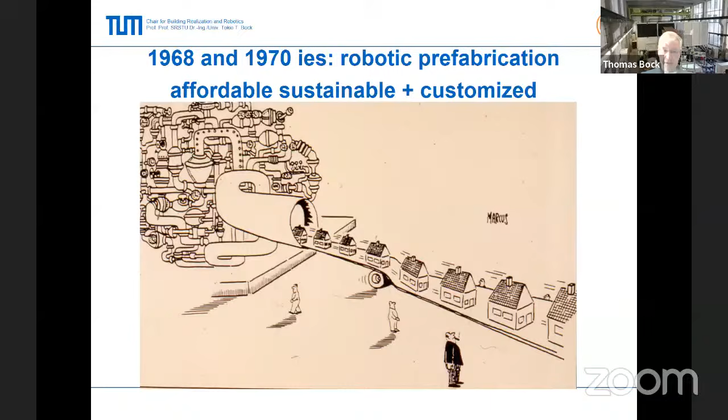And later in the 70s, this industrialization prefabrication became more and more customized. And here, especially robotics played a crucial role in order to produce prefabricated one-of-a-kind buildings. For example, one of the first systems I did myself was a masonry robot, because in Germany, people like to live in brick buildings. But building a brick building by hand takes a long time and has a high labor cost share.

So here we produced a prefabrication robot for masonry walls. And here you see how the robot is placing the brick and spreading the mortar. This was exactly 32 years ago.

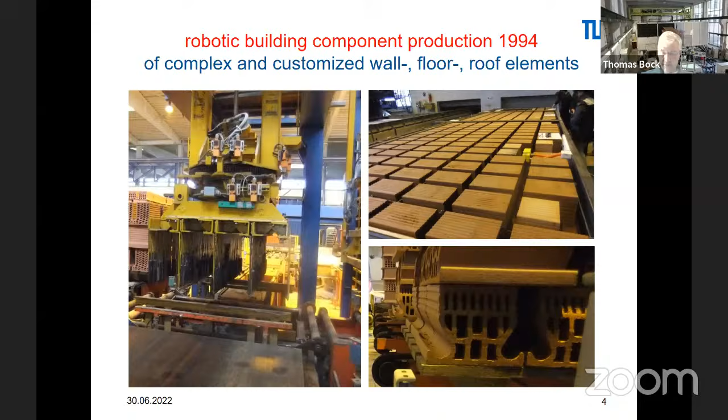Another type is the horizontal production type. Here we place the bricks on a huge table, and these bricks were custom made for the brick walls. They could be handled easily by a robot, and we also placed all the services, the pipes already for the kitchen, for the restroom, the windows, and so on. And also the reinforcement could be placed already in the space between the bricks, and then after prefabrication the whole brick wall could be transported to the construction site.

Another big factor in construction is, of course, the concrete industry. And here we have prefabrication plants. You might recall the traditional precast concrete factories, the one long line, 100 meters long, for example. They produce all kinds of components, girders, columns, panels. And here we produced one multifunctional robotic unit with two overhead gantry robots that can produce floor panels, wall panels, and roof panels in the same unit. So you don't need this huge, long production line in precast concrete factories.

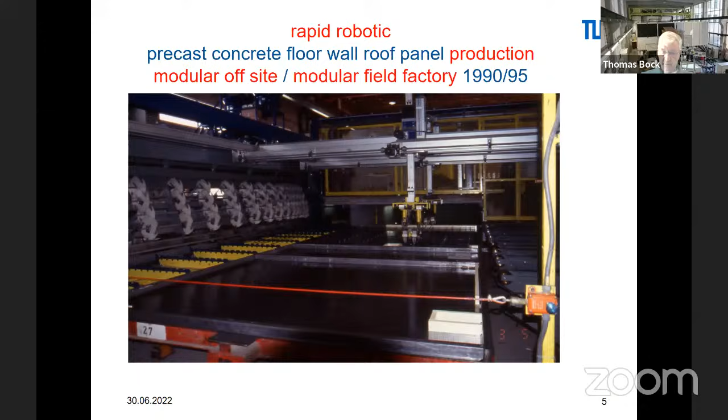And here the robot is placing the formwork first, and then places the reinforcement. And then later, after the concrete is poured in and the windows are set, even the heating system can be set. Everything is there already, the plaster and the wallpaper can be placed. So in the factory it can be highly finished and then brought to the construction site. This is an example also from Scandinavia.

And as I mentioned before, affordable housing is a big topic now. People can't afford their own apartments or buildings, and so here also about 30 years ago we developed an 888 house, and it had about 100 square meters on two floors, and it was prefabricated in 8 days. It could be assembled in 8 hours on site. It was a little bit designed like the Dutch Casco buildings, and it had no cellar, but it was affordable. It cost just like an upper middle class car in those days in Germany.

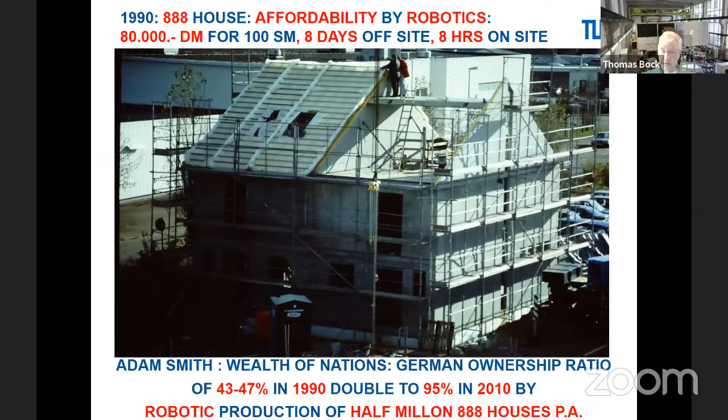So the idea was to double the ownership ratio from 43% to more than 95%. So we wanted to produce about 500,000 houses per year starting in 1990. And also possible, as technology becomes more and more advanced, is increased customization. So not producing boring panels any more, but also three-dimensionally curved panels, prefabricated.

And here we use the CNC milling machine to carve out the negative form from a styrofoam block and then cast in the concrete and place the reinforcement. So each panel was individually shaped and could be assembled into this curved building. So you can combine individualistic design and prefabrication at the same time. And nowadays, you know, all this 3D printing. Here we worked also with a machinery maker, which is producing parts for aircraft as well. And the first software we used in the 1990s was also from an aircraft company in France, and we applied it to the construction industry.

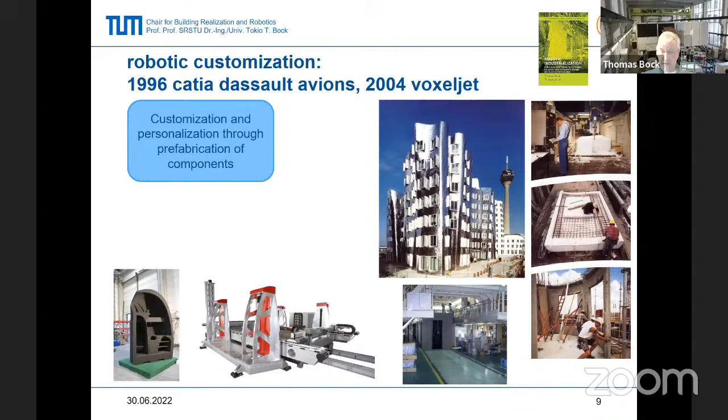So by this method, we could also increase the customizability of the mass prefabrication. It's called mass customization. So we combine the best of both worlds: unique individual design and low-cost mass production. The interesting factor is also that we transfer technology from other industries, like the aircraft industry I mentioned before. Also, Toyota production is very interesting. The Toyota production system was not only applied to cars, but also to houses.

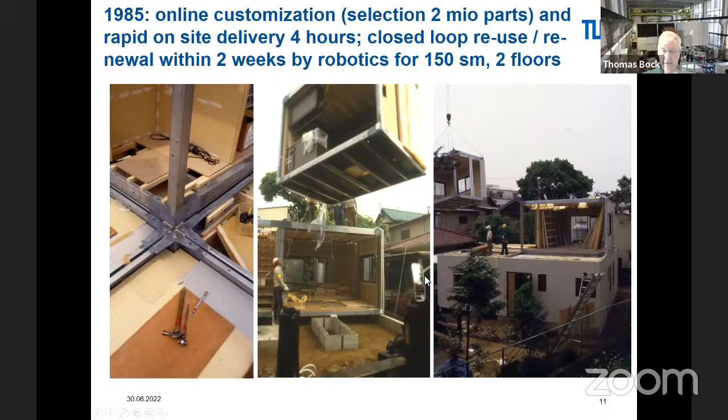Toyota also started a housing business, Toyota Homes, and they applied the production technologies from their successful car industry to the housing sector. And other companies like Sekisui Chemical went into housing, and actually the housing companies became bigger than the chemical mother companies, which is a success story, and also increased the ownership ratio and affordability. And here the houses could be assembled even within 4 to 6 hours, 150 square meters on two floors. The kitchen is already in there, the bathroom is in there. So a very high degree of prefabrication and immediate availability.

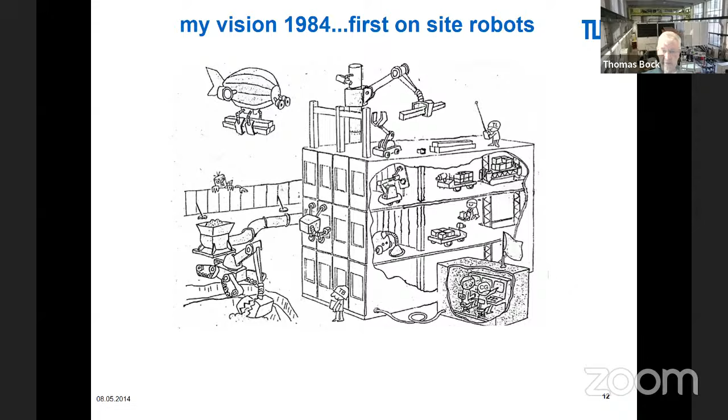That's also a big factor which we need. And then, of course, the next step is the construction site, because most things on the construction site can go wrong. So here we need to now bring in the technology which we know from the factories also to the construction site. But this is a little bit more difficult because things are moving around and the conditions are not as clearly defined as in the factory.

Here I show you some examples of the first robots that had been developed in the 1980s. So for concrete leveling, for welding, for setting panels, for exterior wall assembly and maintenance, and ceiling assembly, and so on. Many you can read in the Cambridge books about construction robotics.

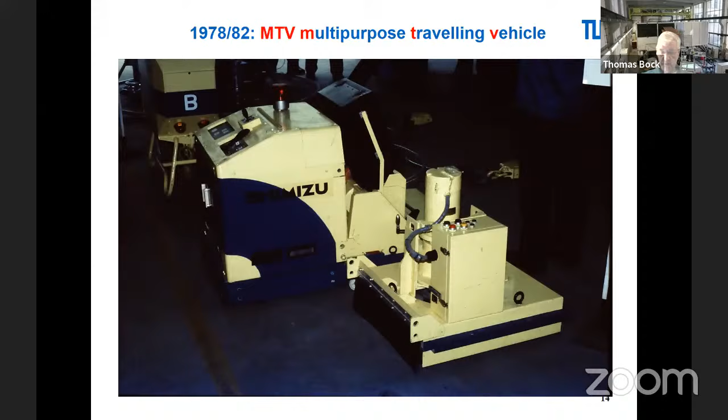And here one of the first ones in the late 70s was the MTV, the multi-purpose traveling vehicle. It has one traveling unit, and it can be attached to different working units for cleaning, for grinding and leveling the concrete, for example. So it becomes a modular robotic system.

Also, overhead work is very bad for the health of the workers. Just remember, dirty, dangerous, and difficult works. Therefore, young people don't want to join the construction industry. We have a problem attracting skilled labor to the construction industry because of the bad working conditions and environments. But because of robotics, we can improve the working conditions for all the workers and make it again attractive for young people to work in this industry.

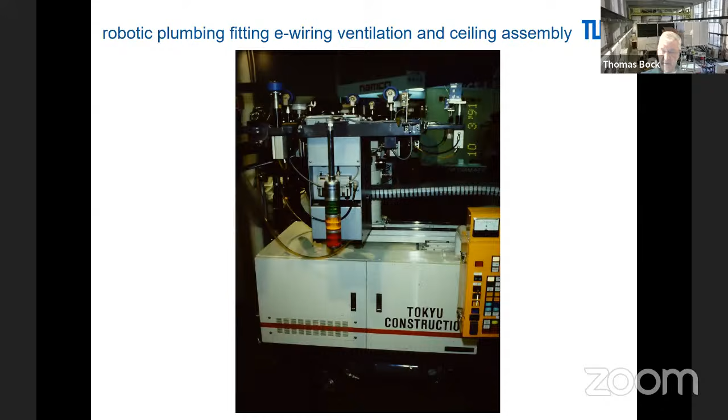Also in Munich, we developed a whole family of interior robotics, finishing the whole interior of a building, not only suspended ceilings, but it can also assemble interior walls, place the raised floor, place floor tiles, wall tiles, and so on. So all the interior finishing could be done by robots, also exchanging the working unit, this time on top of the traveling unit. Before it had been next to it, and here we decided to do it on top. So there are many solutions to develop robots, because sometimes the interior finishing takes up more time than the primary structure, for example.

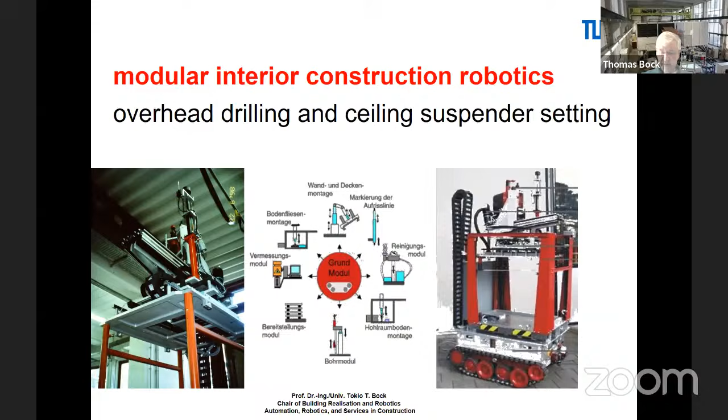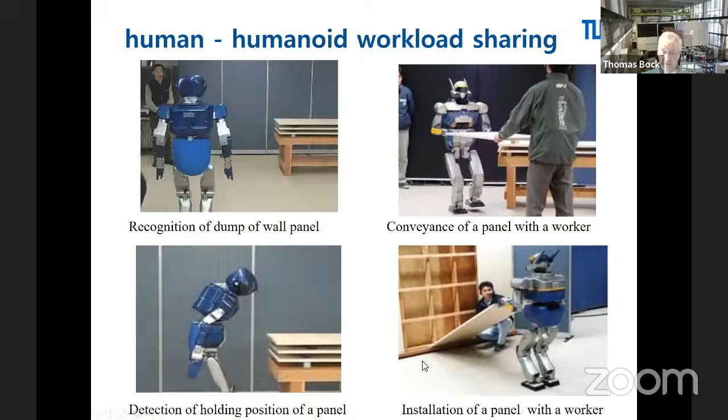Next one is the humanoid workload sharing. So here, this humanoid robot is being tested for collaborating with a human worker for installing interior walls. And then, of course, the most advanced would be the cooperative interior works of 2 robots. One robot, for example, holding the suspended ceiling, and the other one nailing the suspended ceiling in the interior. So it's a pretty good technology. They are lightweight, and 2 robots can cooperate together.

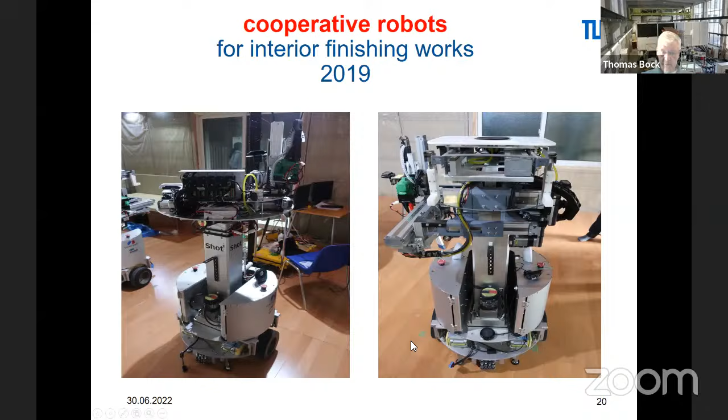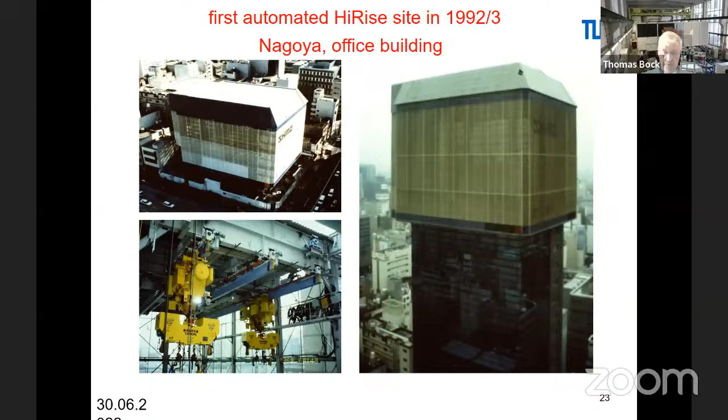And this was my vision of 1984 when I went to Japan. This was the first construction site, which happened in 1992 and 93 in Nagoya, the first integrated automated construction site. I've been involved in the development as well. Here you see the start, the left side, and then running up, a little bit like a vertical shipyard, with about 20 yellow trolley robots working simultaneously, assembling columns, beams, and floor panels. And here you see the assembly of a column. This was also a part of my research.

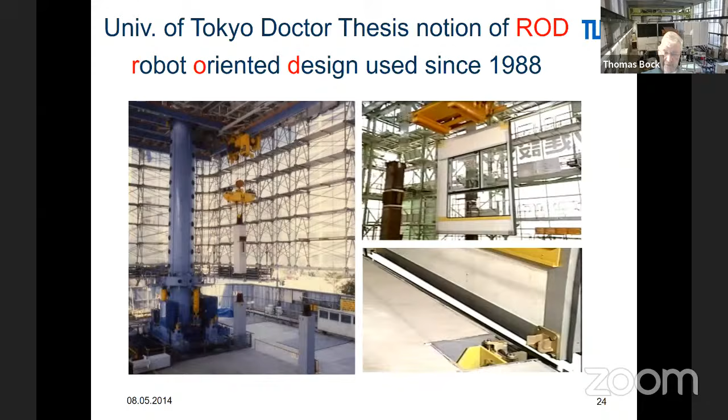I called it robot-oriented design. And so it's easy for the robot to assemble all the components, the columns, the beams, the floor panels, and the facade. So we need a different set of design in order to be successful. We need a totally different approach.

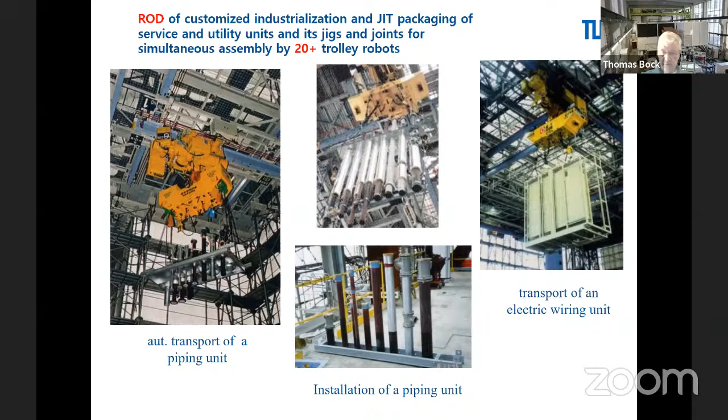For example, here, the detailing of the column joint. And then for the panels, the same thing, so they can be assembled automatically. And for the piping system, piping is very difficult to assemble, you can imagine. So here we used some kind of idea from the shipyards, and then we could assemble the whole bundle together. And this is one of the last sites I was involved in before the virus hit us, in Osaka.

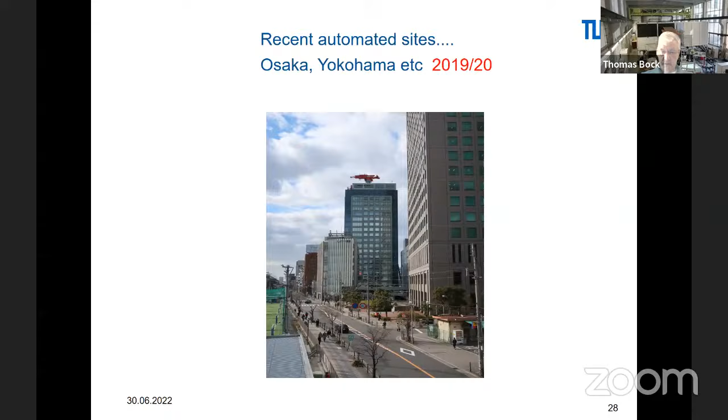And so the next step is, in order for achieving sustainability, because construction produces most of the waste by volume in the world, we should reuse and recycle all the materials. And here, for example, we deconstruct the whole high-rise building. We cut the ground floor and lower the building. And while it's being cut and lowered on the ground floor, on the top floors, the interior is being disassembled and cut and placed into 40 containers.

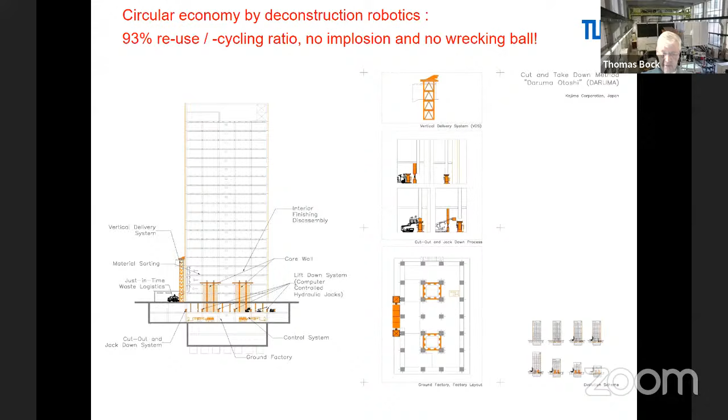So it's not just using a wrecking ball or implosion, and then later you try to get rid of the stuff, which is causing a big ecological problem. But here you can really use the materials because they are clean and sorted and separated in a proper way. So 93% of the whole building can be used again. You see how the twin high-rise buildings slowly disappear quietly, no dust like an implosion, no wrecking ball, pretty nice and clean and quiet.

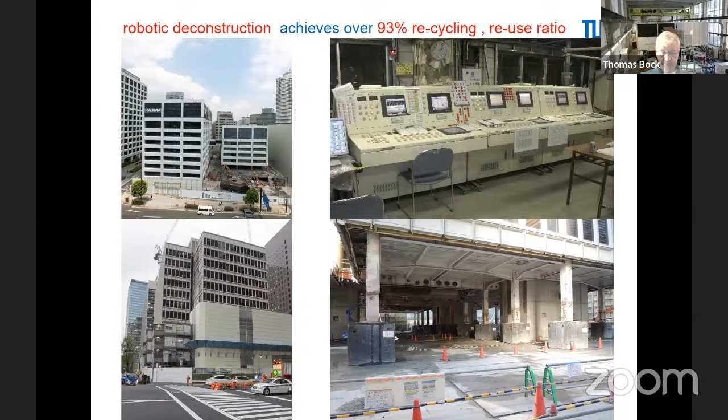And the next, for the civil works, of course, I mentioned before, infrastructure is a big thing. We need more for public transportation and so on, for tunneling, also for gas storage, for example, here for LNG tanks. These robots are building it. It's a very repetitive job, so they can drill the holes, set the anchor bolts, and pour in the concrete for these tanks.

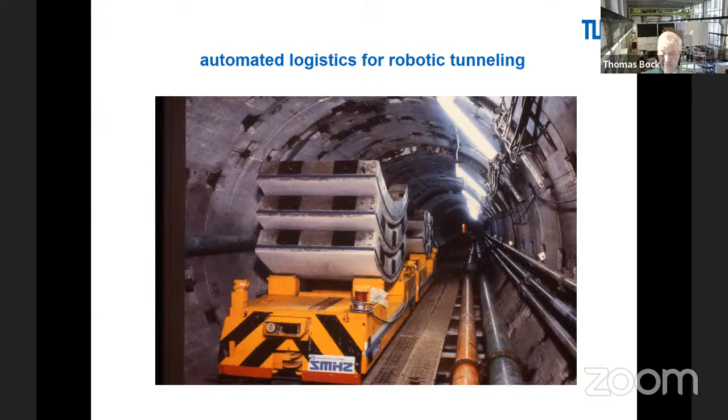Or, for example, tunneling. It doesn't feel very good to work in a tunnel. It's a little bit like in a submarine, so it's better like here. It has been done all automatically already in the 1990s, about 25 years ago, the Kawasaki Kisarazu tunnel project. Here's the autonomous vehicle bringing in the segments. And then at the end, the manipulator assembled the segments of the tunnel.

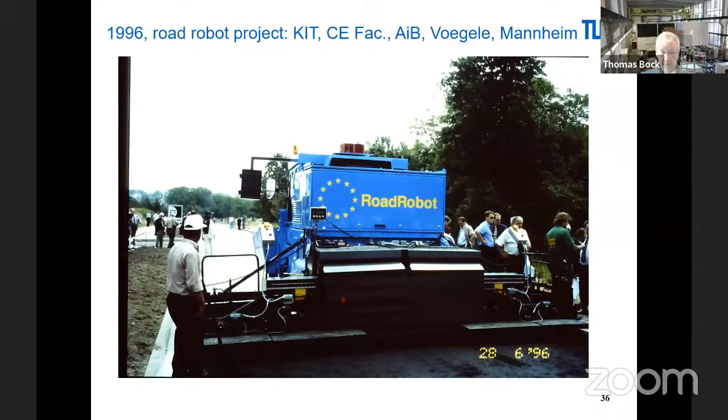Or road construction. Road construction is predestined for robotization. It's repetitive. And this one was a project at my previous workplace, University of Karlsruhe. And it was a European project with a company called Vögele in Mannheim.

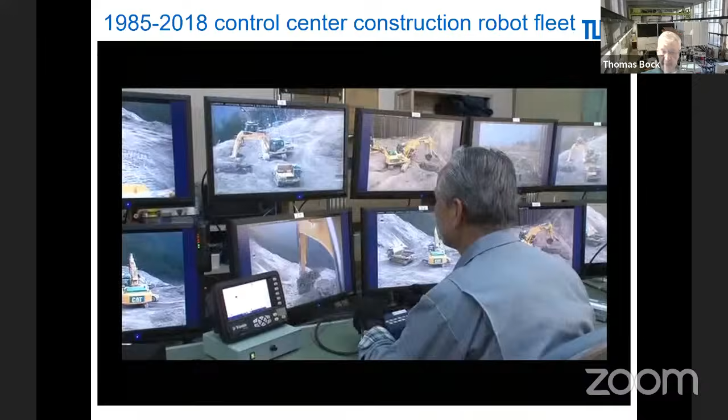And the next thing is, of course, we have robotic construction machinery fleets. Like here, one person can supervise several excavators or also machines for rescue. And here, for example, after disasters, landslides after heavy rain, earthquakes or volcano eruptions, it's better to send in autonomous robots or teleoperated construction machines because it still can be dangerous after heavy rains, or for rescuing the people, or even after volcano eruption. Here you see different applications after volcano eruption and earthquakes.

I've been there myself. It's really steep hills. It doesn't look so steep on the picture, but some of these machines, there was no operator on the machine. They were remotely in a control center controlling these robots, and they were tied down. Otherwise, they would tumble down the hill. So it could be only done by a robotic construction machine or teleoperated construction machine.

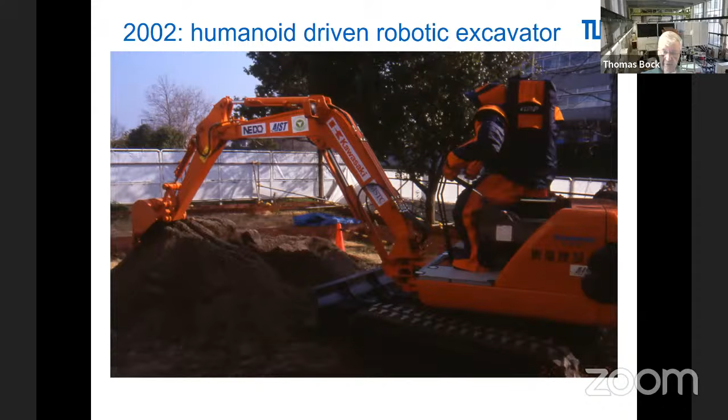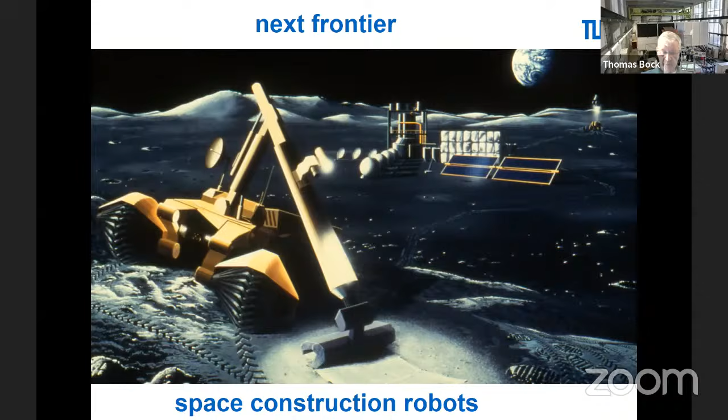Here you see a humanoid robot controlling an excavator. This is also for dangerous areas. So you take out the human and replace it by a humanoid. And maybe in the future, we will go into space, like space construction for mining on the moon or on Mars. This could be the next frontier.

And we have to think about the total ecosystem. You can imagine construction robotics is still like in the age of the horse carriage. The first cars looked like a horse carriage without horses. And there were no roads, so the horses were more efficient in the beginning. But once we got the road network, we got the fuel stations, or later we might have hydrogen refilling stations or battery exchange stations. Then, of course, the car industry took off and nobody's using horses anymore.

And the same thing has to happen in construction. We need a new set of standards, of building codes, and of the whole ecosystem to bring this revolution of construction robotics forward, in order to also ensure the wealth of the nation in the future, because the rent we pay and what we invest in our housing or in the built environment is the biggest investment we do in our life.

Okay, if you want to check more, we have about 300 systems described in our 5-book Cambridge series. You can check it later. We are working on a 6th book now.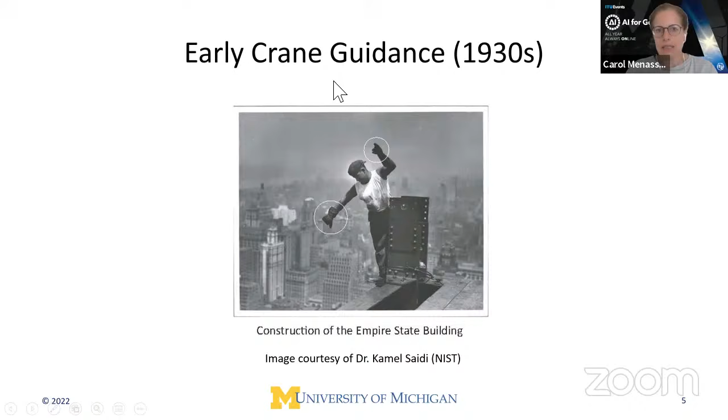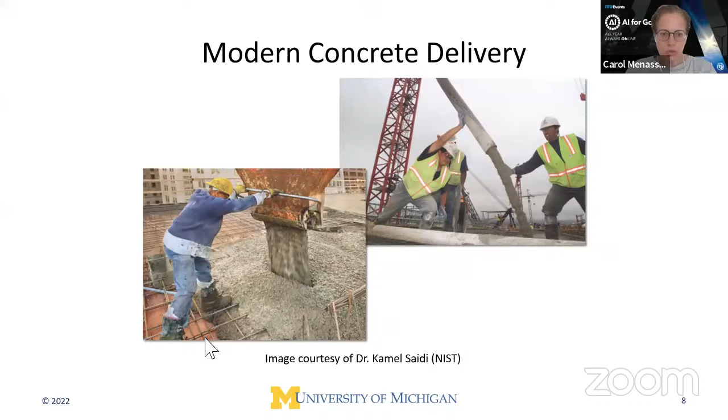Similarly, here you see guidance from the early 1930s. We still see similar situations at this point. And here we are pouring concrete, and we still see similar situations. So the main reason why I wanted to show these pictures is to highlight that construction still...

Productivity in construction, even though there have been advancements and a lot of research and work done in construction robotics, globally still is very low compared to the economy. It ranks at 1% per year compared to almost 3% for the total economy. And when we talk about manufacturing and other sectors, that's even higher.

In terms of safety, it's #1 in terms of fatalities. There are a lot of accidents that happen on construction sites leading to fatalities and also injuries. More importantly, because of how physically demanding construction is, it doesn't allow people of different abilities, women and other members of our community to be part of construction. Here in the US, women make up only 4.5% of the construction workforce.

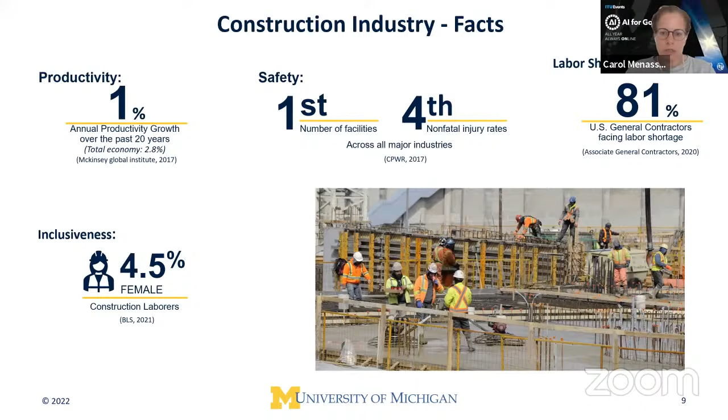And last, currently we are facing a huge labor shortage on construction sites, in the US and across the world. In 2020, around 81% of general contractors reported a shortage in finding skilled labor to work on their construction jobs.

So there has been a slow adoption of construction robotics by the construction industry. And here, what I want to try to show is why manufacturing has been faster to adopt robotics compared to construction. In manufacturing, we have a controlled environment. In construction, it's usually an unstructured environment.

In manufacturing, we're producing identical products. Construction projects typically are unique projects, so you don't produce the same building over and over again. The work pieces move to the robots. In the case of construction sites, the robot has to localize itself and move to the work piece to be able to complete the job. And in manufacturing, we have tight tolerances. In construction, we have loose tolerances. So we often see a lot of discrepancies between as designed and as built in construction projects.

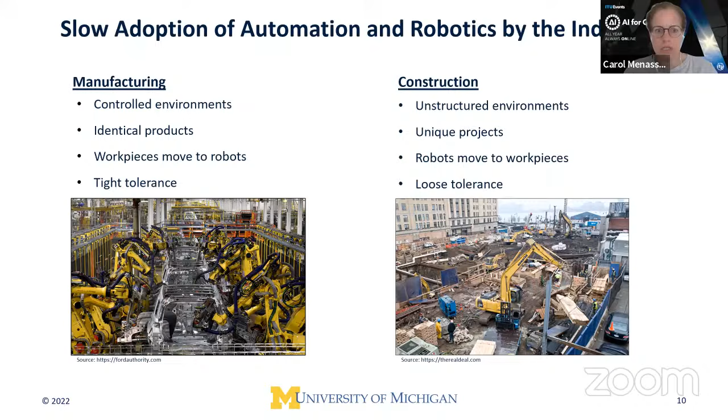So moving on, typically to complete a construction task, a human would need cognitive skills, planning skills, as well as physical skills. So when we think about robots, we think that the robots can eliminate the physical burden and take over all the physical work that creates back pain, neck pain, etc. for construction workers. And we think that we can leave the cognitive and planning part of the task to the human worker.

However, our research team also thinks that with the advancements in artificial intelligence, we can have the robot not only do the physical work, but assist the human in terms of cognitive and planning. And I'll show some examples in the next slides.

So with that, we can say that we can create very efficient human-robot teams by capitalizing on humans being creative in the design. They're adaptable, they have perceptual understanding, and they learn from experience. Whereas the robots have high physical capability, they have minor deviations detection, so they can detect any deviations from as designed. They have fast numerical computation and high speed and accuracy.

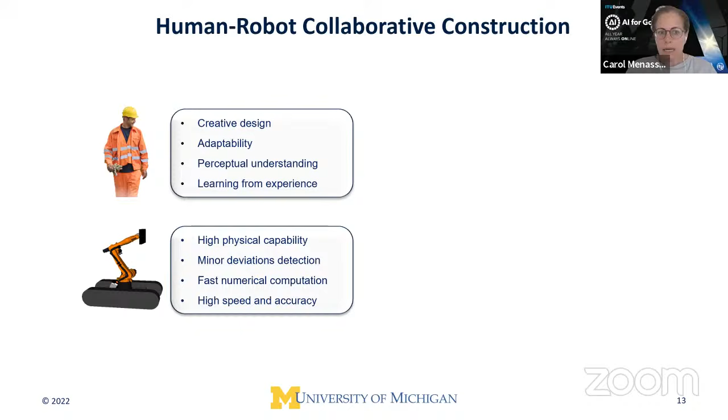So combining the skills, or if you want the experiences of both the human and the robot, we can ensure safer, more productive, less physically demanding jobs, and more inclusive, especially in terms of attracting, like I mentioned earlier, people with different abilities as well as the younger generation to construction.

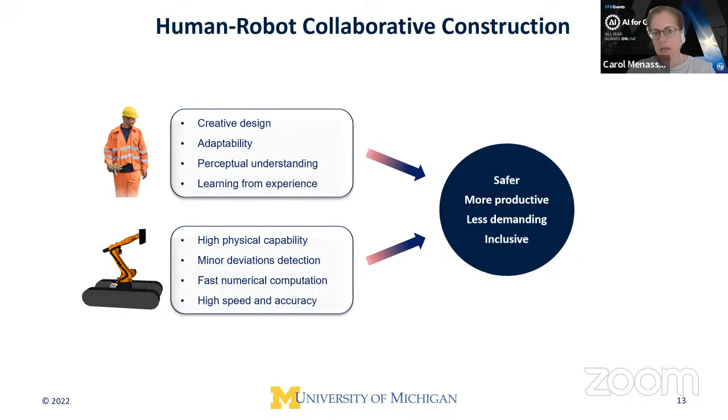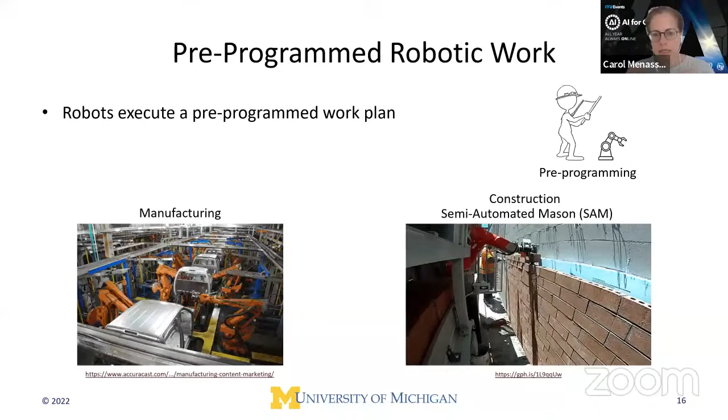So for the first one, the pre-programming, obviously the human still has all the planning work and the robot would execute the construction. So in pre-programming, the robot executes a pre-programmed work plan. So you give it a plan and it just goes and builds it. It's very similar to what you see in manufacturing. The robot has to be transferred, assembled, and localized on the work location. So what you see here on the right-hand side is the SAM robot, which is very popular in the US for brick laying. If we go to the next slide, okay.

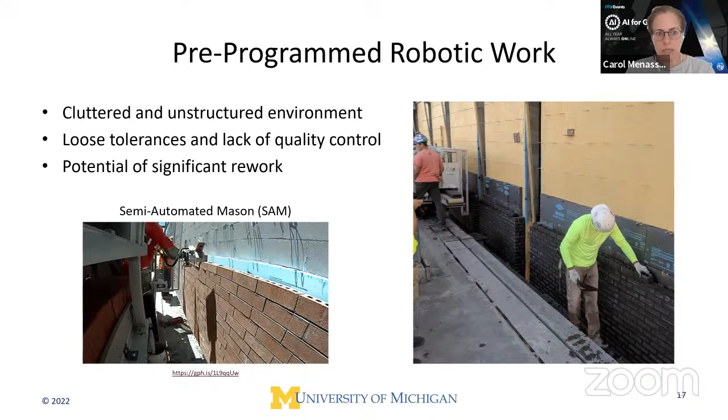The main problem with pre-programming robots for construction work is that construction sites are cluttered and unstructured environments. There are also, like we mentioned earlier, loose tolerances and lack of quality control. So this might create a significant amount of rework, or the human has to be heavily involved in every step of the construction process. So moving on, what are some of the advancements that have taken away some of these disadvantages of pre-programming robots for construction work? The next level would be adaptive manipulation.

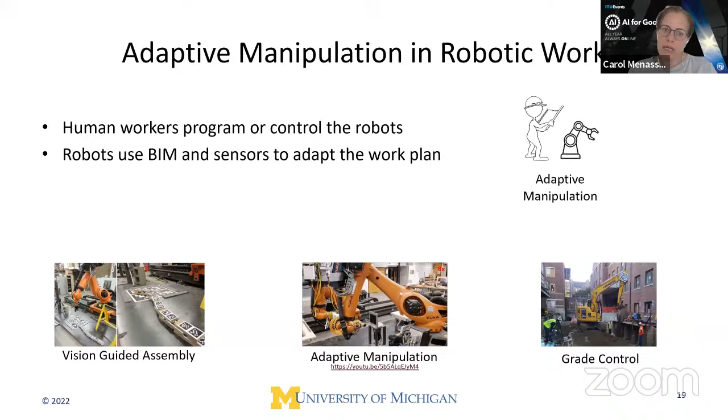So let me explain what we mean by that. In this level of human-robot collaboration, construction workers program and control the robots. However, the robots use building information modeling or any 3D modeling combined with sensors to adapt to the work plan. Typically on the construction site where you want to incorporate robots, you have sources of spatial uncertainty. That means we have error in correctly estimating the pose or the location of the robot. And also we have the construction tolerances that I keep referring to.

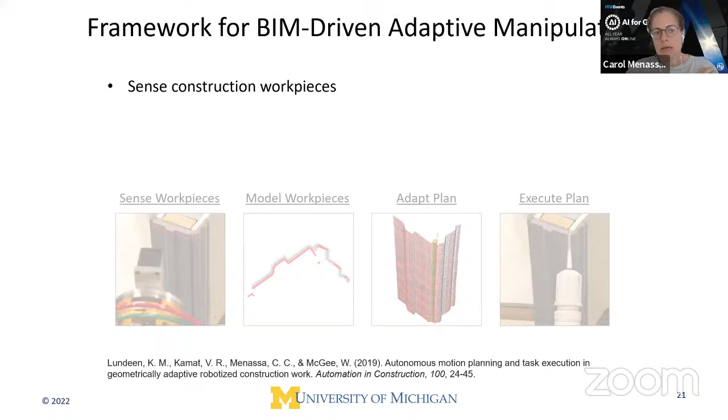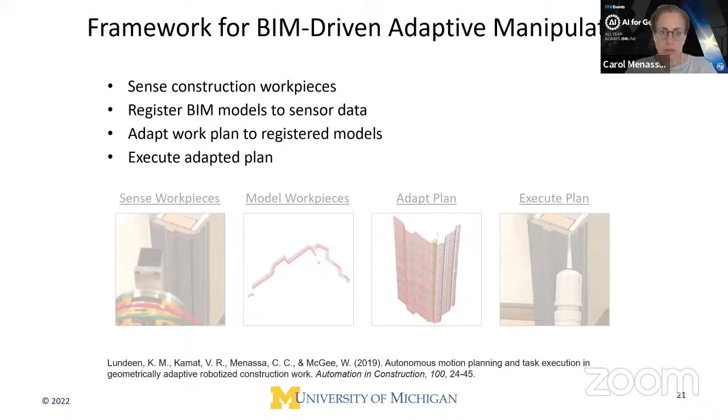So typically what you see here, for example, the actual location of the window deviates from what the BIM model has been designed for. So the main challenge is how to determine the actual pose and geometry of the workpieces. So what our team has done is we have created a method that allows the robot to sense the construction workpieces, and I'll show you that in a video in a moment. It registers the BIM model to the sensor data, then it adapts the work plan to the registered BIM model, and then it executes the adapted plan.

So here you can see this is in our lab at University of Michigan. The robot has used the camera to sense the joint, and then it adapted the work, so it found that the joint is not straight as it was in the BIM model. It adapted its work plan for that. So here, the human is still controlling, still helping the robot realize what it needs to do, but the robot is able to adapt to the work. So we're giving it a little bit of intelligence for it to be able to complete the work on time.

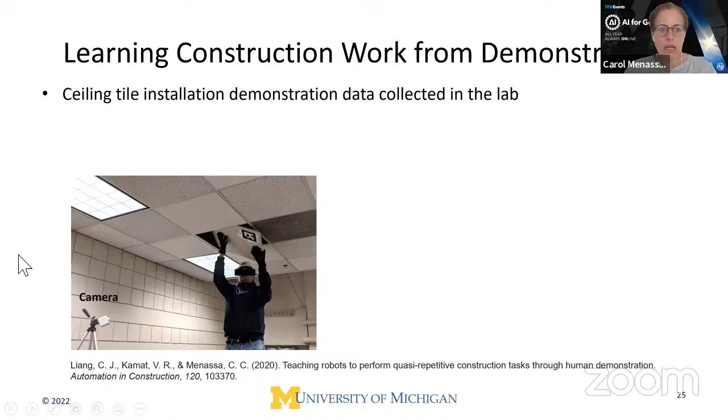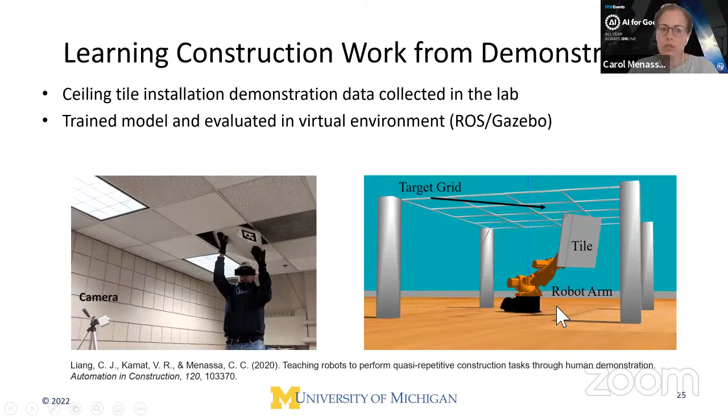So again, this is an example from our lab. We have a ceiling tile installation where we demonstrated this and collected videos, so we're using computer vision as part of this. And then we trained the model and evaluated it in a virtual environment for the robot to determine if the robot is able to learn from the demonstration that the humans have provided. So let me try to play this.

Okay. So basically, we had a success rate of 80% in terms of the robot learning from the demonstration that we provided to install the ceiling tiles. But here we are maintaining that the grids are very similar to the grid that we used when we demonstrated, and there are no changes in terms of the size of the ceiling tile, etc. But we all know that on a construction job, you will encounter HVAC pipes, there'll be ducts, there'll be other issues that the robot will encounter. So not every tile it's going to install is going to be similar.

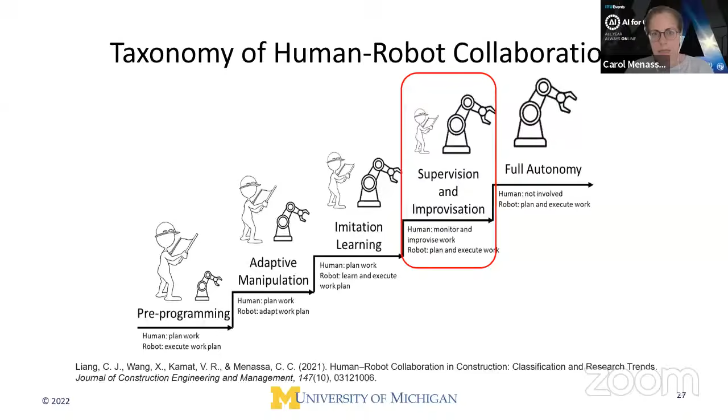So what we need to do is, if the robot is not able to learn all these special cases, provide it a way to communicate with the human so that the human can help it adapt and then install the remaining special case tiles. So this brings us to this level, which is supervision and improvisation, which is the main underlying foundation of the project that I mentioned earlier that we have funded from the U.S. National Science Foundation. So, like I said, our team is interested.

Sorry, Carol. Hi, sorry to interrupt. There just seems to be a bit of an issue with the audio. When you're speaking, there's some crackling going on. I'm not sure whether you can just correct that quickly, or perhaps come closer to the microphone on your laptop. Okay, I'll try. Is this better? Yeah, I think that's better, actually. Thank you. Okay, thanks. So 1 second.

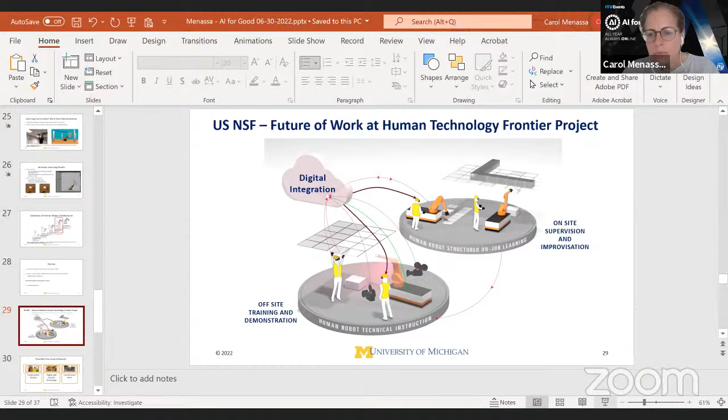So for this project, like I mentioned earlier, we are interested in advancing the construction worker and thinking about how, with the introduction of robots on construction sites, what role can the construction workers themselves play in this? So for this project, we are using learning from demonstration as the basis, where we can use virtual reality, augmented reality, and other methods where a human can train the robot to do the quasi-repetitive task on construction jobs. And then on the actual construction site, the human would monitor the work that's being executed by the robot, but also assist the robot in case it needs to improvise for the special cases.

So for example, in ceiling tiles, we mentioned availability of an HVAC system that needs a different manipulation to place the ceiling tile, that can be a corner, smaller size tile as well. So in doing this, we are focusing on 3 main research areas, which is the construction workers themselves, obviously the digital and robotic technology and how we can advance that so it can assist construction workers in completing the work, and also thinking about how we design a building, how we manage a building, how we construct a building might be affected by the introduction of these robot assistants or human-robot teams on construction jobs. I'm going to go through this very quickly, but these are some of the questions that our team is tackling in terms of this approach.

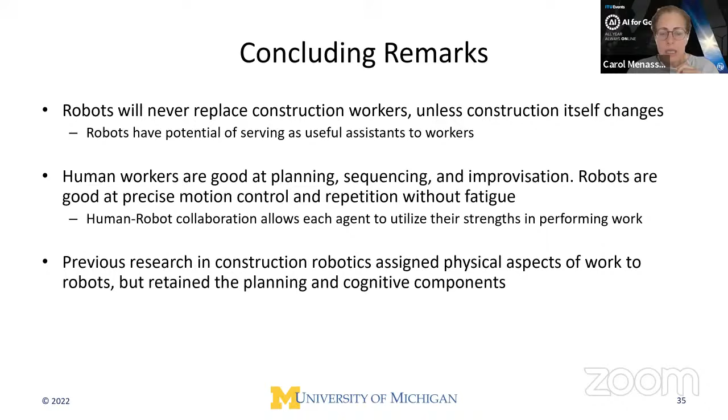Previous research in construction robotics assigned physical aspects of work to the robots, but retained planning and cognitive components. However, now with the advances in computing, this will allow us to explore new ideas where robots can participate in cognitive and planning aspects of the work in addition to the physical work.

Awesome. So today I'll be talking about how you reduce waste in construction using machine learning and artificial intelligence. Briefly, I'm going to touch on the problem, how you can formulate this problem, what are the opportunities there for AI and robotics, and then how this problem has been tackled currently, or how it's been looked at by academia versus industry, and where the challenges lie.

So a lot of people are probably well aware that construction is one of the world's largest industries, but it also happens to be one of the world's most inefficient, along with logistics, transport, and healthcare, I think. It is so inefficient that nearly €13 trillion a year gets wasted because you're not able to plan.

You're not able to match what you're building to what you're planning. In fact, construction is such a wasteful field that close to 30% of every construction project ends up in a landfill. That has an incredible carbon footprint.

Not only does construction have an incredible carbon footprint, it also has an incredible economic footprint. Construction operates as an industry on razor thin margins. They operate on between a 1% to 2% margin. But if you think about construction, construction is pretty much a form of manufacturing. Yet every other form of manufacturing that we are aware of has margins greater than 50%, but construction is still operating on the 1% to 2% margin.

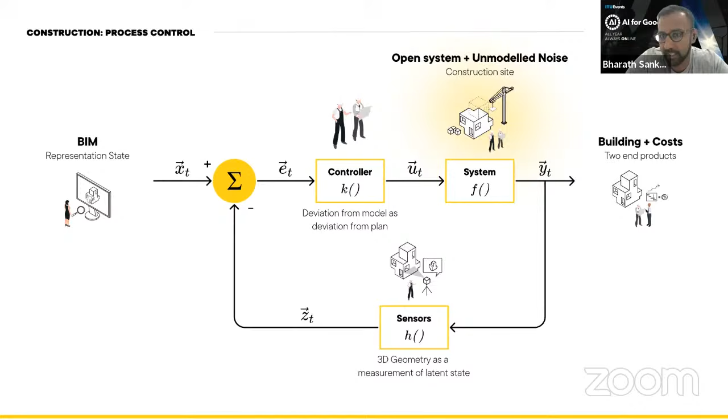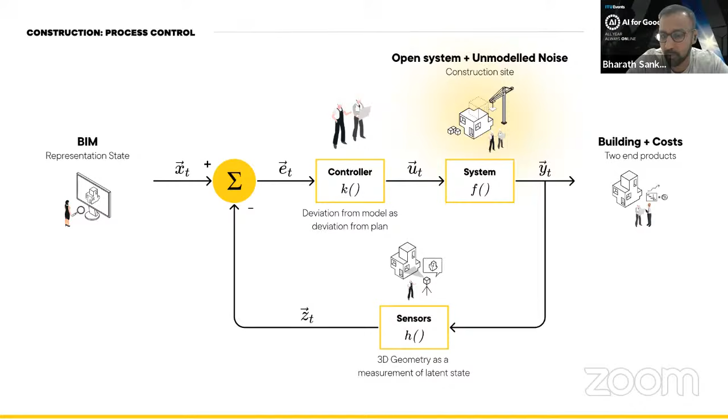Obviously, it's not as straightforward as this little diagram I put over here. One unique problem in construction is that a construction site is an open system. An open system in the sense it's not a manufacturing plant. You're not inside a manufacturing unit where the environment can be controlled. So you have a lot of unmodeled noise that enters this system. How does that affect the problem of process control? And then I'll talk a little bit about what kinds of solutions you can think about for this problem. So how does that affect it?

Well, the first problem in construction, with regards to just the core problem without having an open system, is that a BIM model is a living document on any practical construction site. It's not designed once and then people sit on it. It keeps evolving over time. So this basically means that whatever you're trying to compare against is also evolving over time and it's not fixed in time. So this makes the problem fairly complicated.

The second problem is the construction process is a highly nonlinear process. There is no relationship between what's happening on one floor and what is happening on some other floor. In fact, we have an internal joke at Scaled Robotics, which is that the only thing linear about construction is gravitational causality. You can't build floor 3 before floor 2, everything else flies.

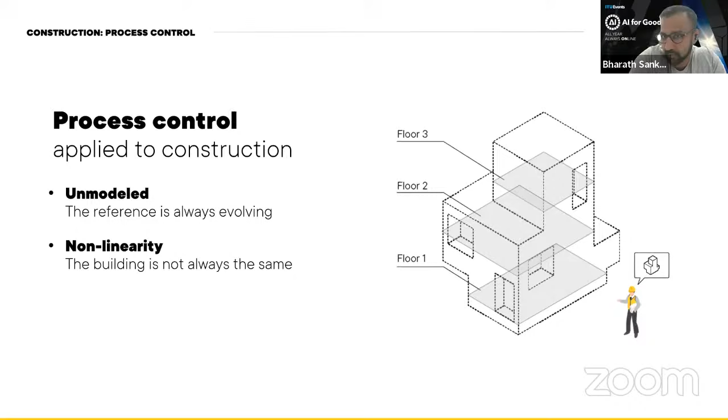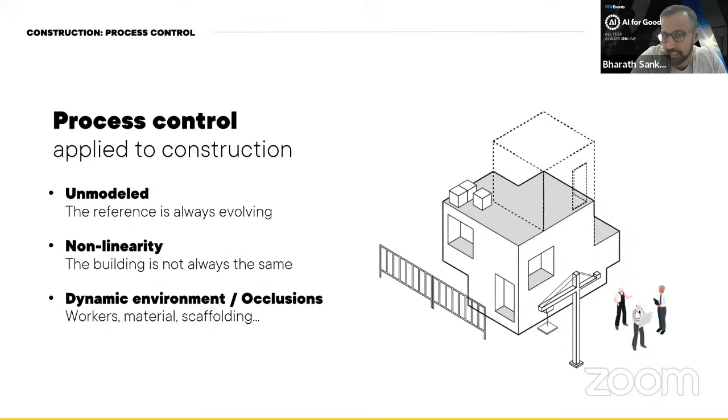Then the environment is fairly dynamic. Since it's an open environment, you have objects, material, people moving through the construction site, machines, all of these things. And all of this limits your ability to actually measure what is going on at the construction site in a significant manner.

And the final nail in the coffin when you're trying to apply process control from a traditional manufacturing point of view into construction is that it's heavily decentralized. On a typical construction project, you have a general contractor that hires subcontractors that hire more subcontractors. So everybody has their own reference plans of how the project is evolving. So it is very, very hard to have a strong reference signal that you can compare against to be able to do efficient process control.

Now that I've kind of painted the very dark scenario of why this is very hard, this is where I'd like to talk about the opportunities. Given the nature of the problem, there are opportunities to apply AI and robotics within construction. And particularly for the problem of process control, which is trying to reduce waste and keep the construction project aligned with the design so that it doesn't generate waste, there are 2 locations where you can introduce artificial intelligence, machine learning, and robotics. So one is in the processing of the data.

As I mentioned, once you measure the construction site, you can use techniques in 3D vision, 3D machine learning, where you have incredibly complex noisy data that needs to be analyzed to figure out how this has diverged from the BIM. And the second aspect is how do you capture this data? Here you can use deployment of robotic technologies, SLAM, autonomous navigation, and all sorts of latest and greatest available innovations to be able to facilitate this measurement of the state on the construction site.

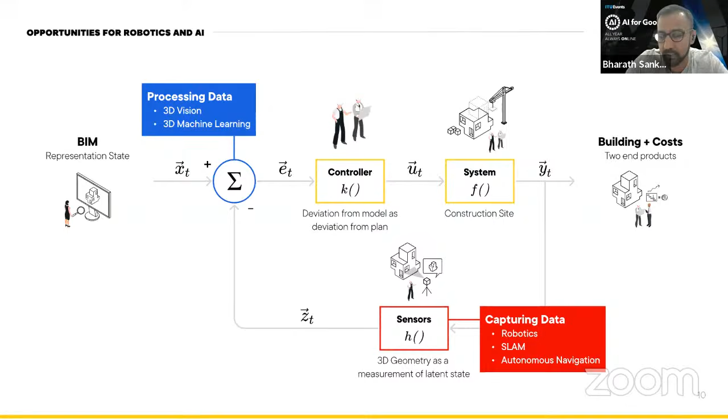And this is pretty much how you can think on a high level about how these problems are being tackled within academia and industry for the process control problem. Academia looks a fair bit at future-focused solutions on how do you go about capturing data? Can we rethink entire surveying workflows with robotic components? And are there new value propositions you can explore? And industry at this point, which is where I'm sitting, we are more curious about how do you integrate with existing workflows and come up with solutions that are better and cheaper than existing solutions, also trying to address the labor shortage.

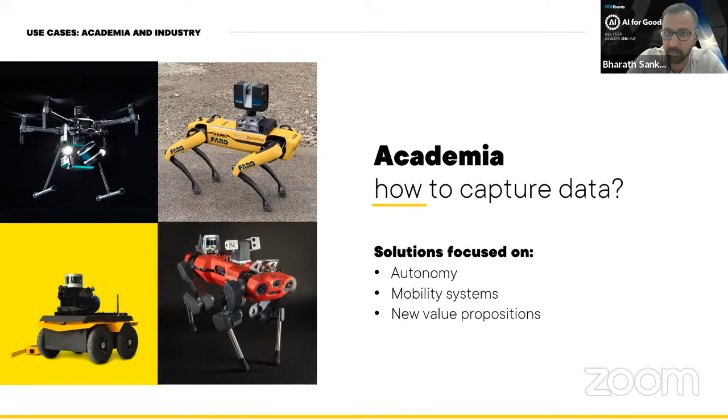And this realizes opportunities. Most of you have come across some form of these robots; one of ours is also there in that picture. These are different forms of reality capture platforms where various levels of autonomy have been implemented to change the entire surveying infrastructure. How do you go about capturing data differently than traditional surveying? Can you do something more intelligent? Can you enable autonomy? Are you limited by the working hours of a construction site? And there's a huge discussion to be had there. And this is one of the areas where using automation can help. Industry is basically, all right, assuming you capture data in a traditional way, can you do something that humans cannot do or is a better solution than humans?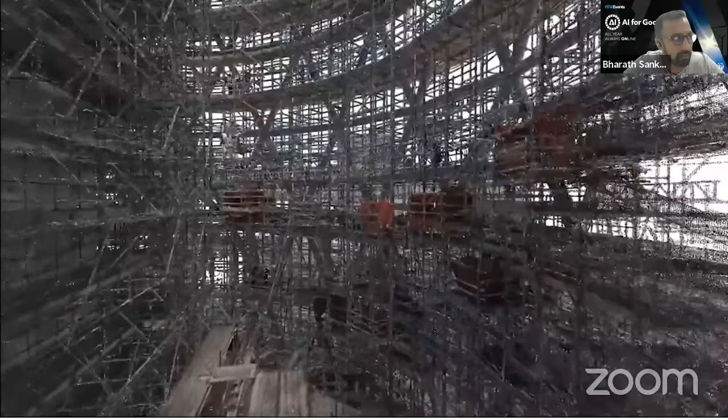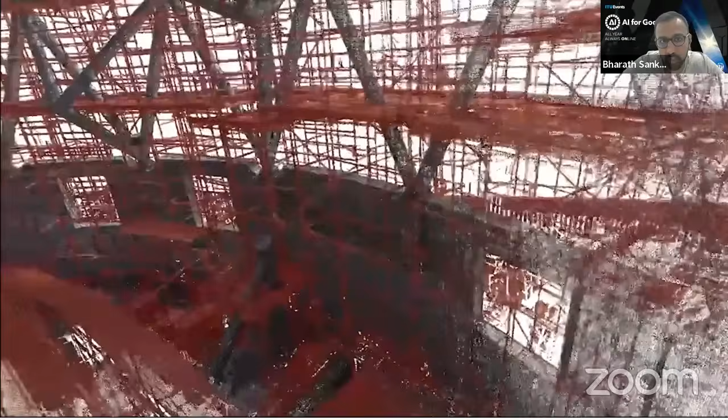And on my penultimate slide, I'm trying to show you a little video of what we actually are capable of at Scaled Robotics in terms of progress control. This is a complex construction site. As you can see, it's very hard to distinguish between what is the site and what is the stuff that does not belong to the building. In our algorithms, we use complex machine learning, computer vision techniques and optimization techniques to be able to automatically filter out the interesting signal from this complex site, and then do very efficient progress control for our clients, where we can tell them what exactly is going on at their construction site, what has been built accurately, what has been built inaccurately, and what is missing and behind schedule. So green means you've done a good job, yellow, you've done a horrible job, and red, it's missing.

With that, I'd like to wrap up and thank my team, who are basically the brains behind all of these things. And one of the big things we keep talking about is how construction has a very bad representation of women. And they always say, you know, charity begins at home, so why don't you be the proof for what you're doing? We are actively pushing towards having 50% female representation within our company. And in a small company of 35 people, we are close to achieving that. So you start there, you push the innovation, you bring in young talent, and everything else will follow.

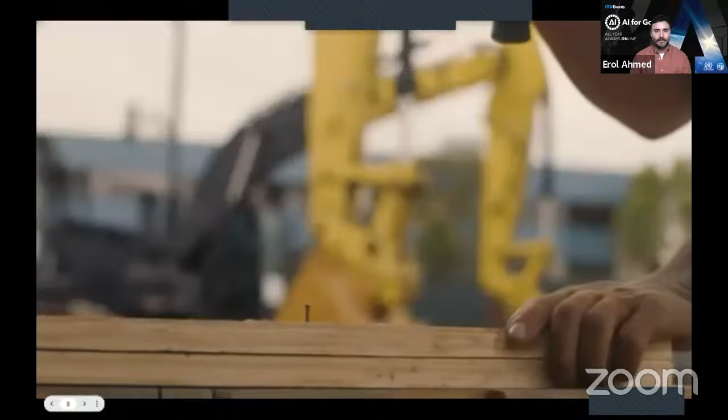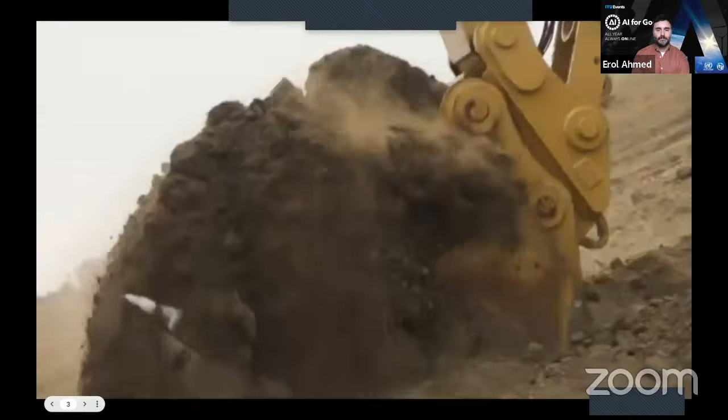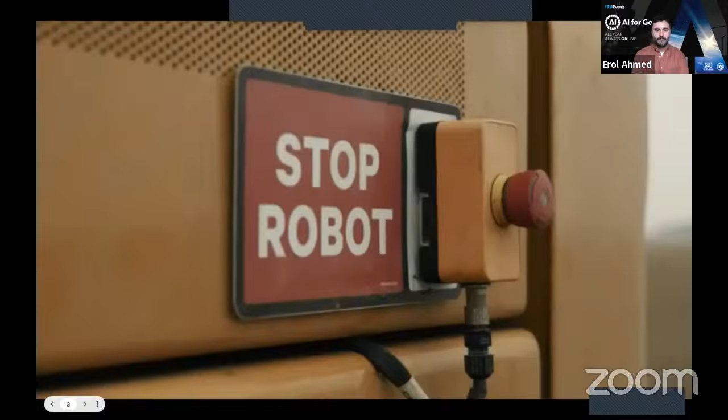There we go. We build the same way our grandparents did, with our own two hands. But the tools in our hands change. Built Robotics has developed the most advanced tool available on any job site today, the Exosystem. It transforms any excavator into a fully autonomous robot made to dig the earth. It's powered by a liquid-cooled computer with sub-centimeter RTK GPS, high-efficiency solar panels, an all-weather, all-terrain design. And you can easily switch from manual to AI mode with a flick of a switch. But most importantly, it can dig. Does the idea of an 80,000-pound robot scare you a little? You'd be crazy if it didn't. That's why we've developed an 8-layer safety system with 360-degree camera coverage, proximity radar, 110 decibel safety alarms, ultra-bright LEDs, high-vis barriers, a digital geofence, and hardwired and wireless emergency stops. Because when it comes to safety, more is more. We're here because of the builders who came before us. They created the world we live in, our roads, our cities, our homes. And when they needed a tool to overcome a new challenge, they invented it. Now, it's our turn.

We build the same way.

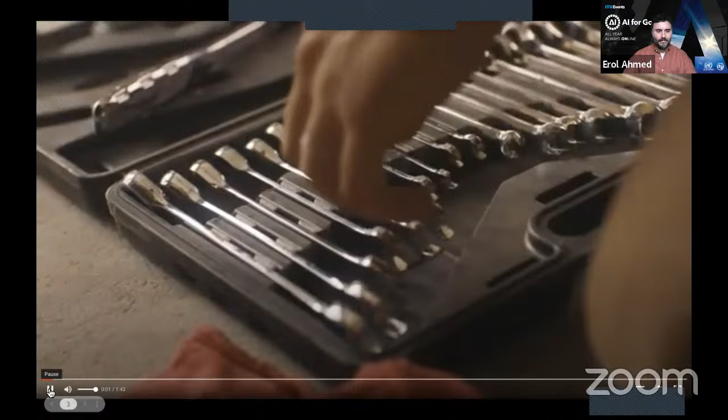So as that video mentioned, we build the world's first autonomous upgrade for heavy equipment, and it's called the Exosystem. And what it achieves is full autonomy on heavy equipment like excavators, where our primary focus is today. And it's an upgrade kit. So actually it is OEM and model agnostic, so you could put it on any machine you have. And that's a big part of our business strategy, and what customers really like is that you can add autonomy to what you already own, which reduces the need to produce more specialized equipment.

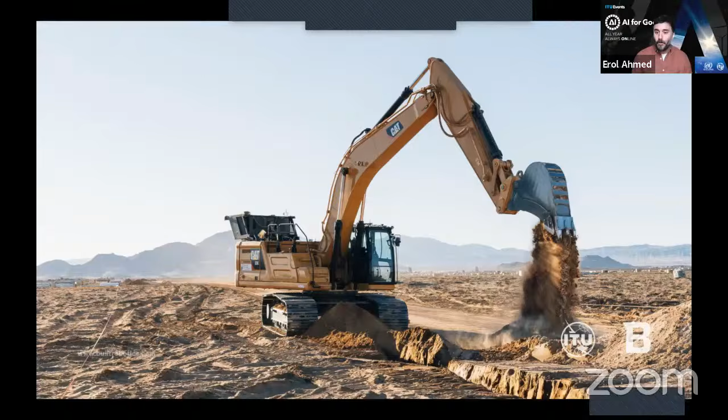It is rugged and weatherproof, working in dust, dirt, rain, cold and hot weather, and any kind of condition that job sites have, which has been a long journey for us with testing and trying to figure out what makes robotics practical on job sites. I mean, there's always the disconnect between building things in a closed system, indoors, and then getting it out in the field and seeing how people use it.

And the robots today are focused on massive earth-moving projects, and I think that's the biggest benefit of robotics in construction, as we see it. You know, earth moving is at the heart of every outdoor building project, and if you could automate that one piece today, you're going to unlock a lot of potential for savings and productivity gains and changing how we build the world.

Energy, utilities, water, telecom, data centers, you know, anything that requires buried infrastructure is what our robots focus on. And trenching is at the heart of that automated task.

And when we look at robotics in job sites, especially with Built, how do we look at it? The way our focus is aligned is to talk to our customers and see what contractors and the construction industry care about. They care about consistent production and utilization. Utilization is huge because in traditional utilization with a human operator, you're looking at anywhere from 30 to 50% utilization. But with robotics, that same piece of equipment can go from 50 to 80% utilization. And you get very consistent production, often at speeds the same or faster than manual methods.

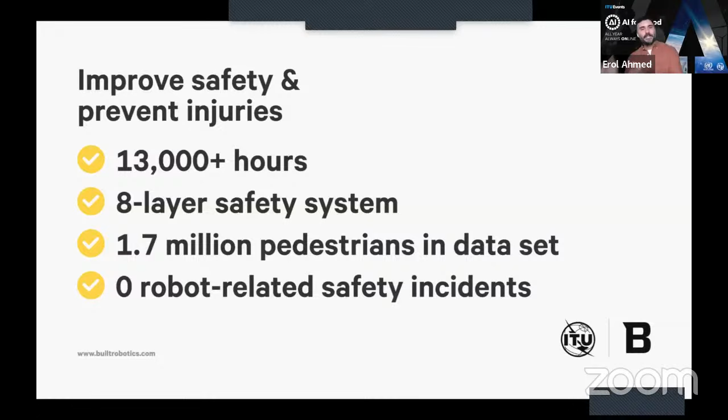So the first part of robotics at Built is how does it improve the customer experience and make a better job site? The second part, of course, is safety and preventing injuries. Because as you know, job sites are incredibly dangerous areas, and we talk to construction workers who love their work, and often their own children want to get into it, and they tell us time and time again that they're worried because it's a dangerous job, and they don't want people to get hurt. So we take safety very seriously, and I think that's one of the benefits of robotics, not just productivity, but creating safer job sites. And we do this through an 8-layer safety system.

This involves a number of physical barriers, fences, signage, warning signs, safety lights. These are for humans to let them know something unique is going on with this machine. And then we have virtual safety components for the robot, like geofences, IMU sensors, cameras, pedestrian detection. These are things the robot needs to know that it is working safely and correctly. And these come together to produce a safer job site, take the person out of the cab, and let them move on to other tasks.

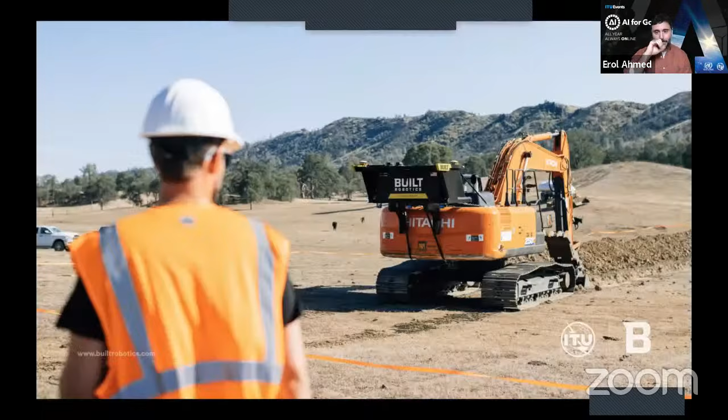Here you can see what that looks like in deployment. There's the orange safety barrier. It's hard to see the sensors on the robot, but there are a number of cameras, IMU sensors, and things of that nature that keep the robot working safely. So that's how our robots work today in the job site.

But how do robots tie in with sustainable development goals? There are a lot of ways they can help, and what Built focuses on with earth moving is sort of at the very core level. When you think about food systems, irrigation, when you think about sanitation and getting water to the right places, when you think about clean energy, solar farms, wind farms, when you think about climate action, building levees, building fire breaks for forest fires, these are all things that require earth moving, that require infrastructure to be built and support cities and places where people live. And so trenching and that aspect of earth moving is actually at the heart of a lot of ways we think about sustainability and the goals we're trying to achieve on this planet.

And finally, an interesting one is decent work, innovation, and growth. Robotics, of course, we think of as innovative, but we also need to think about it in a growth mentality and creating decent work and equitable work for people. And a big part of Built Robotics' mission on that last point is the creation of new roles for skilled workers. Contractors can't fill jobs in the United States, these are US statistics, by the way, but we have a huge backlog of work that needs to be done.

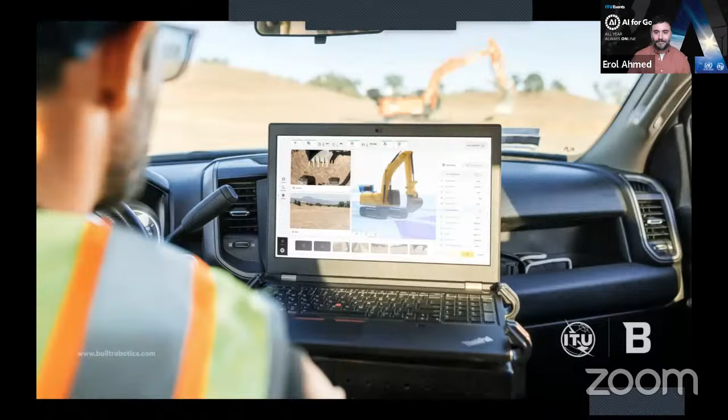We built a software solution for the REOs, and they work on the technology to make sure the robot is running correctly and productively. And what that means is, to us, the future of autonomy is collaborative. You can build a solution, it can work well. How do you get it into as many job sites as possible at a cost that makes sense for contractors? We're very practically oriented at Built Robotics. We want construction to be a bigger industry, to have more people involved in it. We want to have technology be at the forefront.

I think there's a stigma that construction is tech averse, but that's actually not true. They are always at the forefront of using new tools and technologies, but they have to be cautious because a lot rests on their shoulders. They have a lot of responsibility building our infrastructure, our homes, our energy. And then working with the right kinds of partners, standards bodies, educational trade organizations. Built, for example, has a contract with the International Union of Operating Engineers, the largest trade union for operators in the United States and Canada. And we have specialized training for their union members to get them up and trained on robotics so they can take that technology wherever they work on job sites.

And so with collaboration and keeping the barrier of entry, the cost of deploying robots as low as possible, we think we can get more and more robots on job sites and unlock this potential and move beyond the horse and carriage era of cars and onto the future of automated job sites.

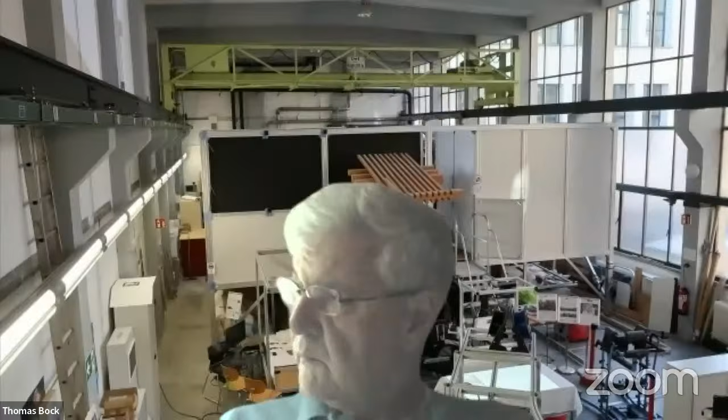Okay, now it works. The many sites I've seen in the last 40 years and where I also was involved in, it had a different degree of automation. Sometimes there were only 30% less people working on the construction site, and the most advanced construction site had 70% less people working. So it depends on the degree of automation, on the approach. Basically, I don't worry about replacing humans, because when we look at the past, at the history, the agricultural society, actually every one of us was a farmer.

And then the Industrial Revolution happened, and of course the farmers became unemployed, but they went into industrial jobs, and new jobs had been created. And this happened very successfully in Britain and in the United States and so on. And this created the world we live in now. So I think it's a win-win situation. We will have new jobs, new opportunities, and so I don't worry so much about this.

And what you mentioned about refurbishment: actually the cable-driven parallel robot we developed, which I showed you, was on site in Spain just 2 years ago. It was for refurbishment, for rebuilding and upgrading the old buildings from the 50s, 60s, 70s, to make them more energy efficient in Europe, because 98% of the building stock is already there. Only 2% of the building stock is going to be built as new construction. So, as mentioned, we have to refurbish and renovate.